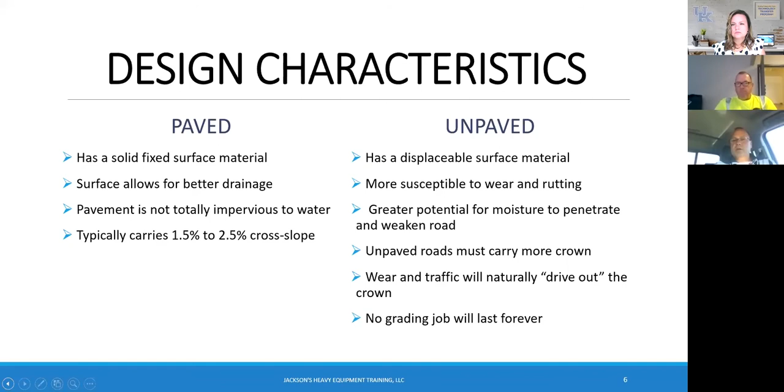Okay, let's get down here to our designs. Some of the different design characteristics between a paved road and an unpaved road - there's a lot to consider in how you maintain them. A paved road has a solid surface, whereas an unpaved road has a displaceable surface where we always have to be reclaiming material and bringing it back up onto the road. An unpaved surface is a lot more susceptible to wear and rutting, and to moisture weakening the road. They have to carry more crown than a paved road because a paved road has a solid surface. One important thing to remember with an unpaved road is traffic is going to beat the crown out of it - it's going to ruin your road, so no grading job lasts forever. When we take a look at the first design, this is a good design for paved roads.

When we take a look at this profile here, it shows a separate shoulder area. The shoulder area has a more defined slope to it. That more defined slope typically runs about 6%. On a paved surface, like we said, we're running 1.5 to 2.5%. On an aggregate road, we have to run more.

One of my recommendations is you want to try to stay around that 3 to 5% cross slope on an aggregate road for the drainage, because it requires a lot more drainage when you're out there.

If you're using this design on an aggregate road, it can be difficult to maintain. And a lot of it comes down to how you train your operators, because with that material moving all the time, they've got to try to bring that material back up onto the road and not get that lip or that shoulder.

It can also be difficult to maintain that shoulder if you're limited on your right of way. It does take a lot more extra maintenance, especially when it comes to mowing and motor grader passes and trying to recover material. But it is a really good design for a paved road, because you need to have that extra drainage on your shoulder area to keep the moisture from getting underneath your paved road.

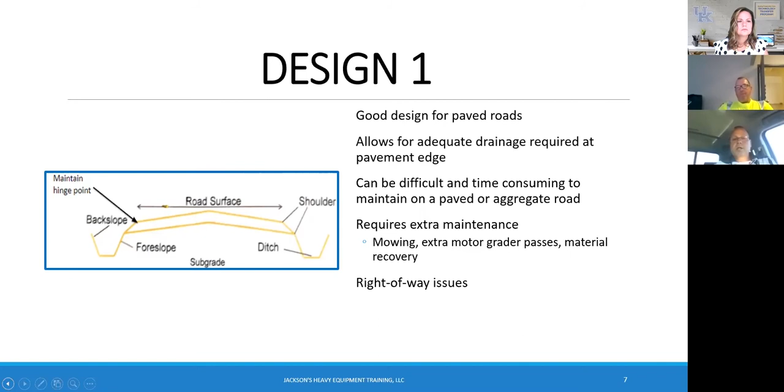When we apply design 1 to an aggregate road as an operator, especially depending on how they've been trained, we tend to lose our road. We reach out there, we're always trying to grab, and we tend to cut that shoulder down. So we create a lip on the edge of our road. And then we also lose the hinge point into our road, which is really valuable for drainage and being able to bring that material back up.

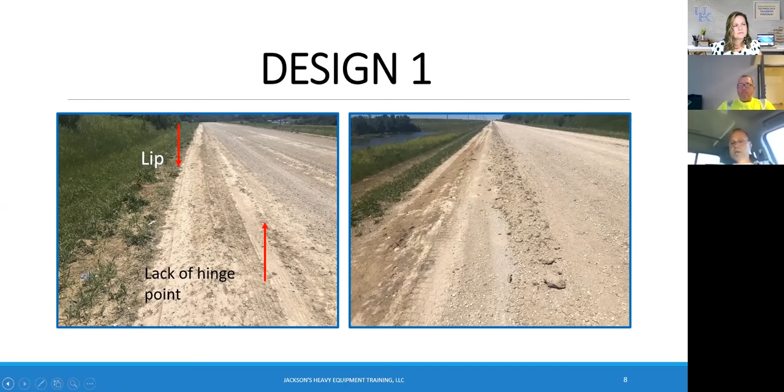But with design 1, having that extra 6%, about 3/4 of an inch, is really important to keep that water away from our pavement. We've got to keep that moisture out from underneath our pavement, and we've got to get it draining away from the road. It can be difficult to maintain because as we have that soil out there and we get drainage and the water runs, it tends to wash that all away all the time. So we have to incorporate those maintenance practices back into it to make sure we're maintaining that shoulder.

Pavement drop-offs, not only do they let moisture back underneath, which is going to cause that road to freeze and thaw and bust up, but it can also be a huge safety factor. So that's where we really have to take the time to make sure we're training our operators on how to bring that material back up. If you don't have the material there, you may have to haul it in, but typically a lot of that material is right there to where we can bring that back up onto our roads.

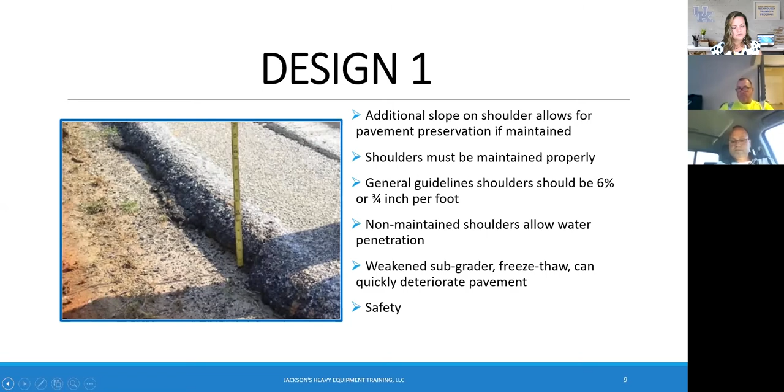When you apply this to an aggregate road, you tend to have soft shoulders. If we're trying to run that grass shoulder out there, we tend to have soft shoulders. So we're going to have to compact those shoulders to make sure that the road is firm out there.

One of the problems you run into with this design is our large agricultural equipment is used on our rural roads, so they need the extra room when they're out there to get over. If you're applying this design to an aggregate road, think of it this way. When you're driving down a paved road after a rain and you have to get over on the shoulder, what happens to the shoulder of your road? It's soft. And the same principle applies to an aggregate road when you're out there.

There's quite a few DOTs out there that use this design for rock embedment. So they'll come in and if they embed rock, they only do it on, you know, the 2 12-foot drive lanes, and they're not utilizing their whole road.

This can also be difficult to maintain if you have limited right of way when you're out there. It requires a lot more maintenance. You've got to keep them mowed. And plus you always have to be bringing back up that material when you're out there.

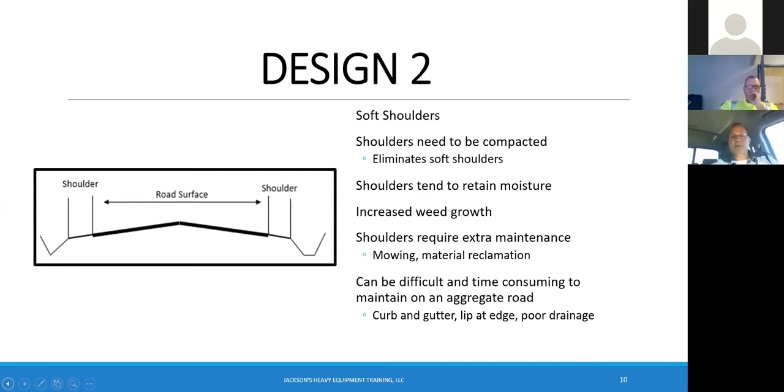It all takes a lot of training and a lot of time to teach your operators how to maintain those, plus with the additional employees that you have to be out there to mow your shoulders while you're out there.

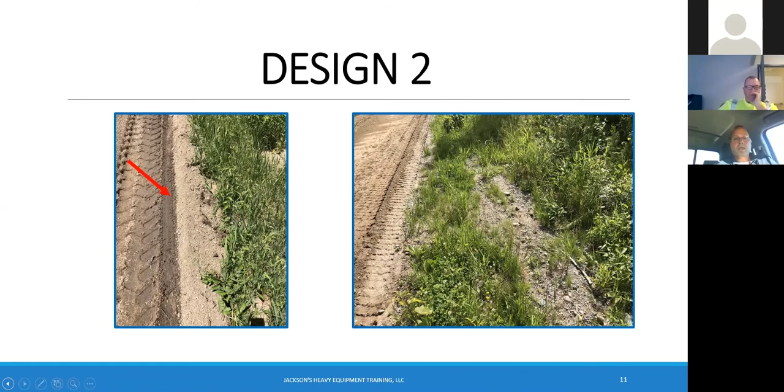Design 3 is the design I use a lot for aggregate roads. Like I said, we try to run a 3 to 5% cross slope. Give your operators a target to strive for when they're out there. I always say 4%, have them shoot for 4%. It's difficult to maintain that all the time, but give them a goal to strive for. This has a greater safety factor on aggregate roads.

One, it utilizes the entire road top. It's more beneficial if you're limited on your right-of-way, and it allows for the ease of reclamation of your material, because our material is going to get lost through traffic, weather, snow removal operations, and poor machine settings when we're out there.

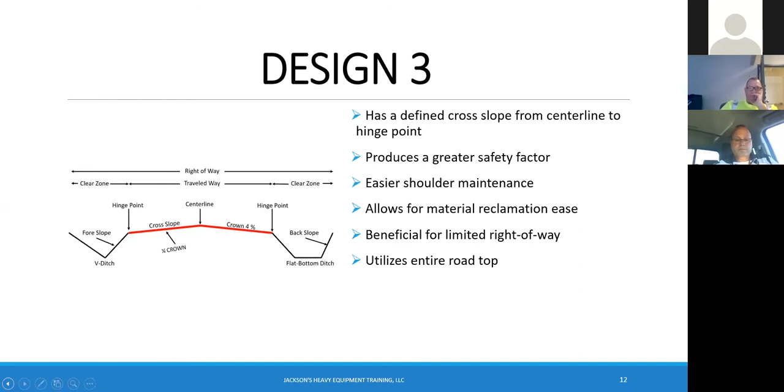When you get into reclaiming material, there's a lot of different ways to do it, a lot of different ways to set the machine. Are we going to do it as maintenance, or are we going to do it as construction?

Most generally, when you go out to look at our aggregate roads, they tend to be more round. If you have a round road, a parabolic shape to your road, you're going to get 3 drive tracks while you're out there. Traffic may still drive down the center of the road, but they're going to straddle your center line instead of placing your tire tracks right down the center of your road.

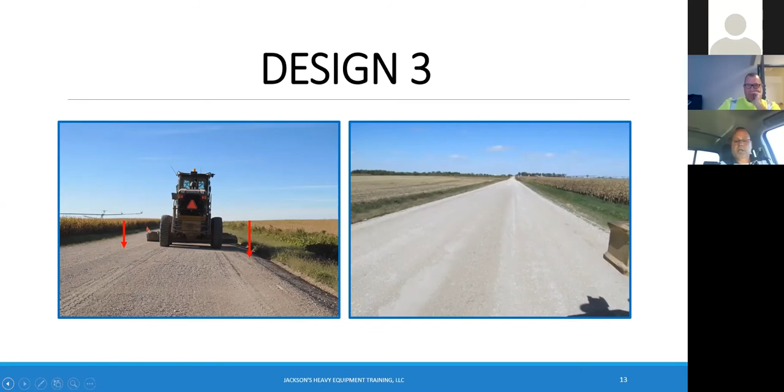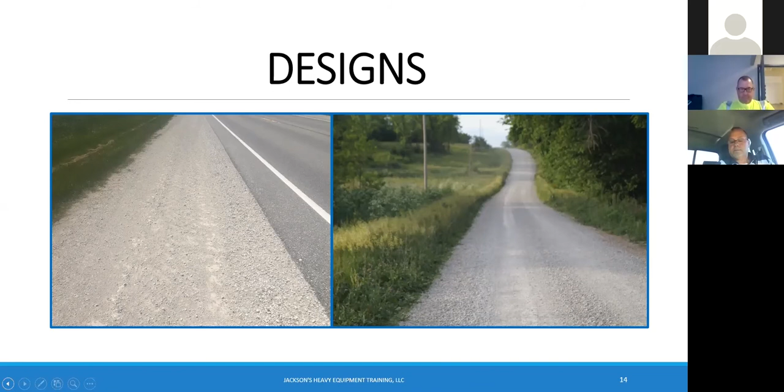So one of the things I like to find out is when you work with your operators, if you deal with aggregate roads and different things like that, which of the 3 designs that we discussed do you utilize in your maintenance procedures when you're out there?

So it looks like we're about tied 50-50 between design 2 and design 3. Does anybody have any questions on either of the 3 designs when we're out there? Would anybody like to add any input as to why they're using one design over the other?

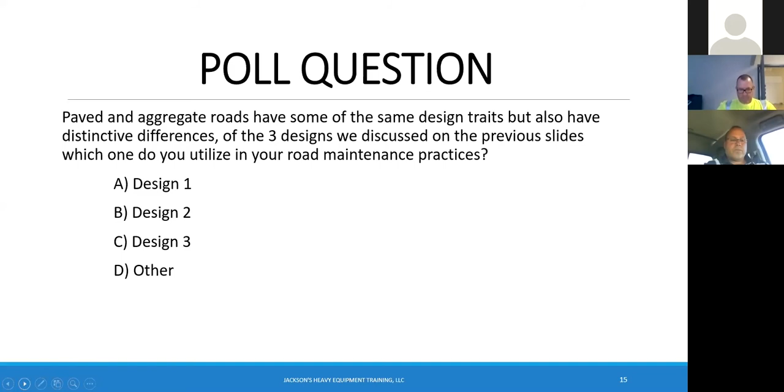One of the big things we need to do when we're out there, no matter what design we use, is have straight blades on our machine. I've done a lot of training, been all over the country, and one of the cheapest and simplest things you can do is make sure you have straight blades on your machine. You have to make sure you're rotating your blades.

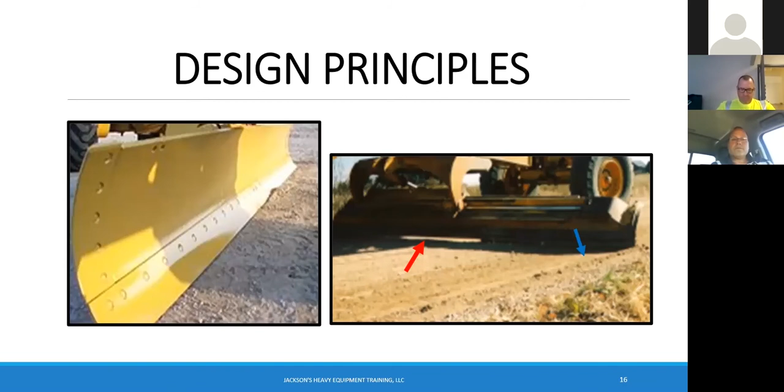No matter what design principle you're using out there, you're going to build a true A shape to your road, that modified A shape. You've got to have straight blades when you're out there, and straight blades will really help you do that. It's good for drainage and everything else.

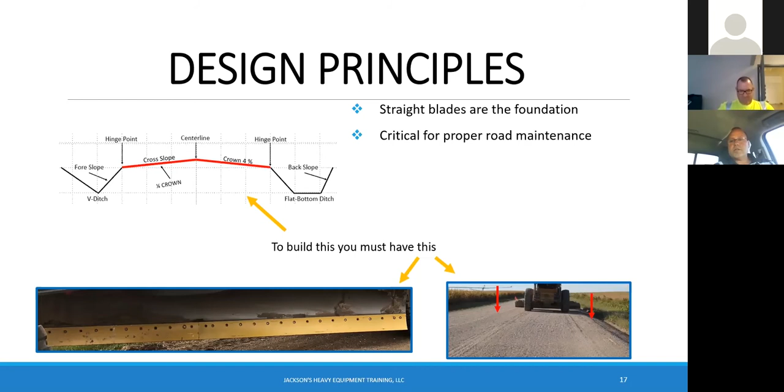Another issue I run into a lot when I'm out there doing training is cross slope. How do we determine the cross slope in our roads? What device do we use to help us determine that percentage of cross slope? What is that called?

I think Nicole was going to pull up the poll question. Right now we're looking at 100% slope meter.

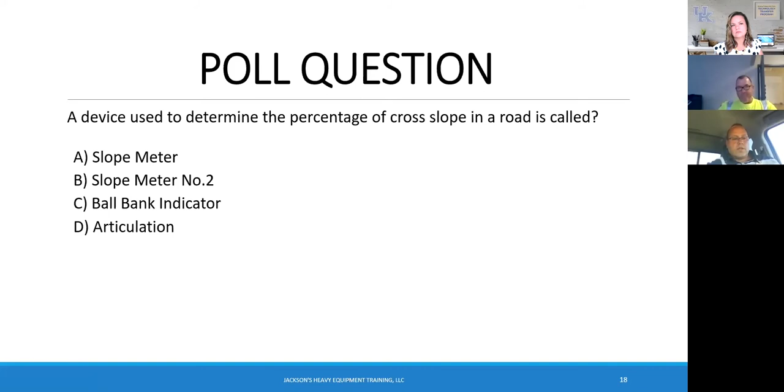There are different kinds of slope meters we can use out there, but one of the things I want you to remember is we're trying to determine the cross slope in our road. So actually, it's not a slope meter, it's a slope meter number 2. That's one of the issues I run into out there—a lot of operators are running a slope meter in their machine instead of a slope meter number 2. The slope meter shows you what you're running for, like a 3-to-1 slope or a 4-to-1 slope. The slope meter number 2 actually shows the cross slope on your road surface.

I've done trainings where operators will say, man, if I get mine all the way out to 3, it's going to feel like my machine's tipping over. Well yeah, it's going to feel like that because you're actually running a 3-to-1 slope instead of a 3% slope. There's a huge difference. So make sure when you purchase this stuff—it can be confusing—you research it and get the right slope meter designed for what your operators are going to be using it for.

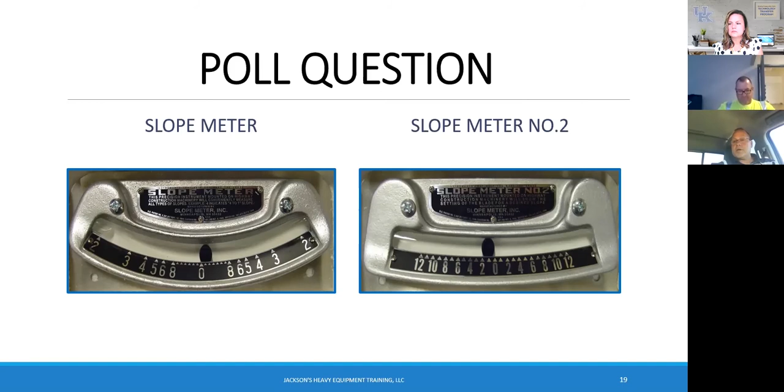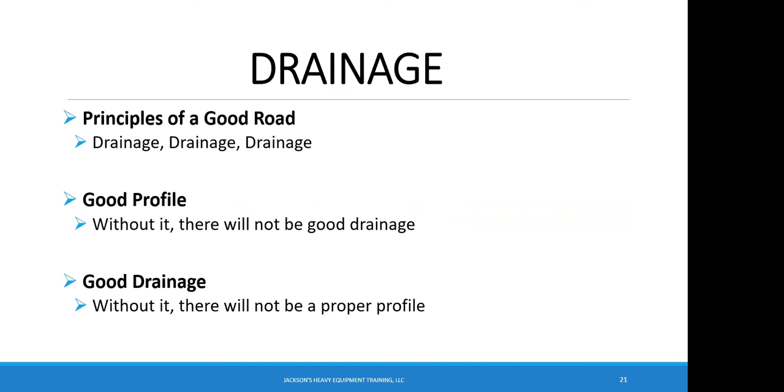We're going to talk a little bit about drainage now and the importance of making sure your road is profiled properly. Everything when it comes to road maintenance, road construction, how often you maintain a road, it all comes down to drainage. You have to have good drainage when you're out there.

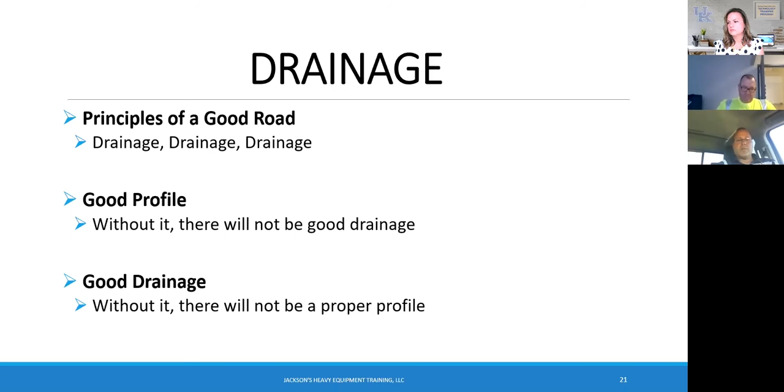You've got to be getting the water out of the center of the road and over to your ditches. It'll be difficult to maintain that profile if you don't have good drainage out there. This is probably one of the biggest issues I run into doing training—we develop that lip on the edge of our road. A lot of that comes from the techniques we teach our operators and the blades on our machines, so we're creating some of our own problems out there.

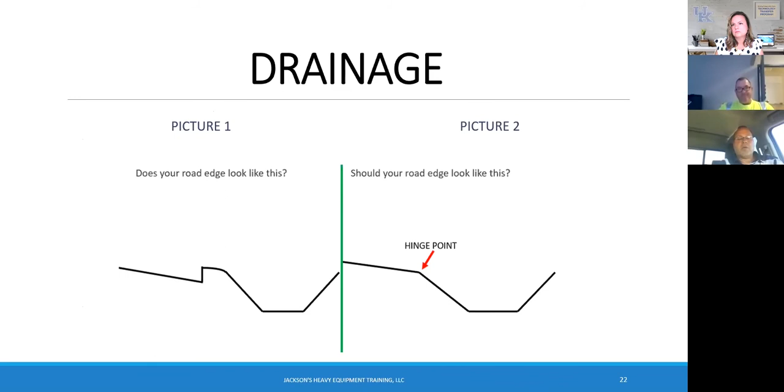We want to try to make sure we maintain that hinge point on the road so we have proper drainage. If we're getting that curb and gutter effect out there, we're going to retain that water, and it's really going to soften our shoulder and reduce the life of that road.

So when you crown a road and you want to establish the cross slope, which part of the motor grader carries or controls the grade?

This is a question too. Right now we're running about 50% wheel lean. We're about split thirds on all of them between wheel lean, the heel moldboard, and the toe moldboard. There we go, we're getting some more. Now we're changing up a little bit. Heel. Just select the answer that best describes your work.

This is always a good question too, and it really comes down to training techniques, what you're utilizing when you're out there maintaining your roads. Are you carrying windrows? Are you not carrying windrows? Are you reclaiming material, or are you just doing simple light maintenance to your roads? So all those factors play into it.

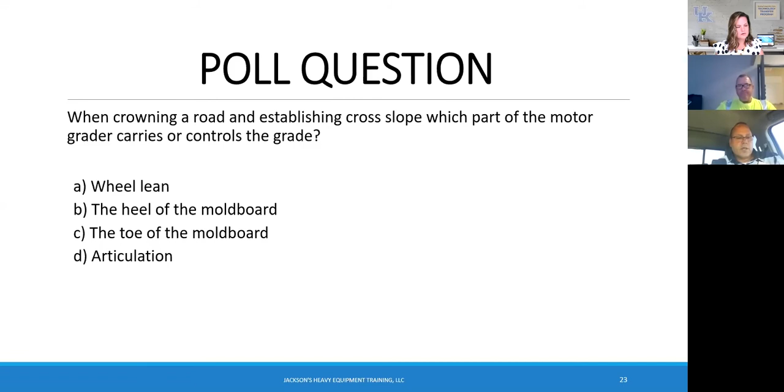It looks like the majority of the people said the heel of the moldboard, and that is correct. It's the heel of the moldboard that carries the grade when you crown a road. When you do grade work and you're forcing or cutting ditches, you cut with the toe. So over the years operators have always been taught that they've got to cut with the toe, cut with the toe, cut with the toe. And actually, the heel is what carries your grade when you're out there.

When you take a look at that top picture, you'll notice how we have our toe up about a tenth or two. If you're trying to build your shoulders up, especially if you're carrying windrows, you leave it up a little bit, so you leave a little bit of material there, so you slowly build it up. When you take a look at that bottom picture, I spend most of my day telling operators, lift your toe, lift your toe, lift your toe, because they're so used to cutting with that toe that they keep actually cutting the shoulder of their road down.

It's one of the things too, if you're not carrying windrows, they need material to fill that moldboard. They've got to fill that moldboard with material. So you're going to cause them to cut that lip out there while they're trying to feed it. So it's really important when you're out there, because one of the things too, when you look at machine settings...

When you look at that top picture with how that machine's set, the heel of that moldboard is going to be centered right on the quarter crown of our road. That's one of the big things we need to try to eliminate when we're out there, is the quarter crown on our road, to get that proper drainage. And when we get back down to that bottom picture, it all comes down to making sure we have straight blades on our machines, because you can easily see the cut in those blades.

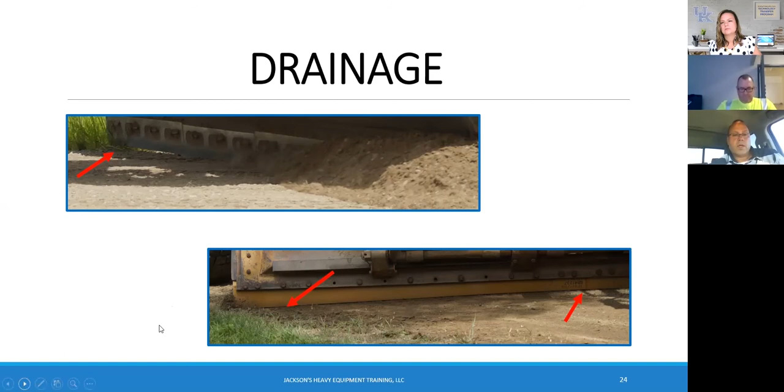One of the big things that we do when we go out there is we've got to reestablish that training - material reclamation. So much material is lost on our foreslopes, down in our ditches. Material reclamation is really important when it comes to preventive maintenance of our roads. We can't just keep putting material out there on the roads. We need to start bringing that back up.

So when we go out there, we show operators how to reestablish that foreslope. You've got to have that good foreslope. One, it's a safety factor - if those vehicles are going to leave that road, you've got to leave them the possibility to leave that road and be able to regain control and come back up onto the road surface.

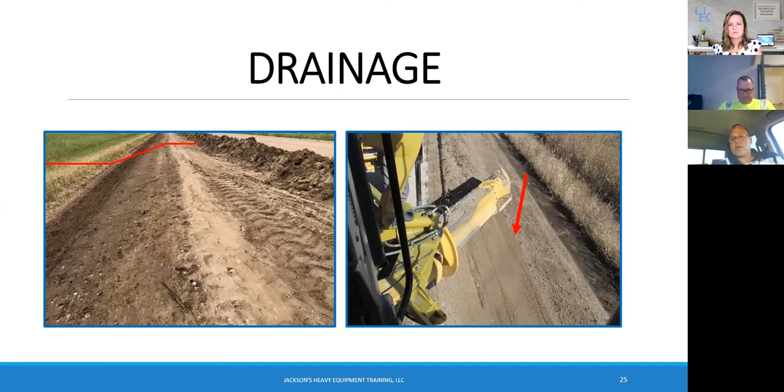So here we've established a good foreslope. We have a nice flat bottom ditch with a good back slope. We recovered a lot of good material on that road. And when we take a look at the picture to the right, you can see how we've clearly established a good hinge point when we're out there. We're really going to have some good drainage. We don't have any curb and gutter. So this is the importance of drainage.

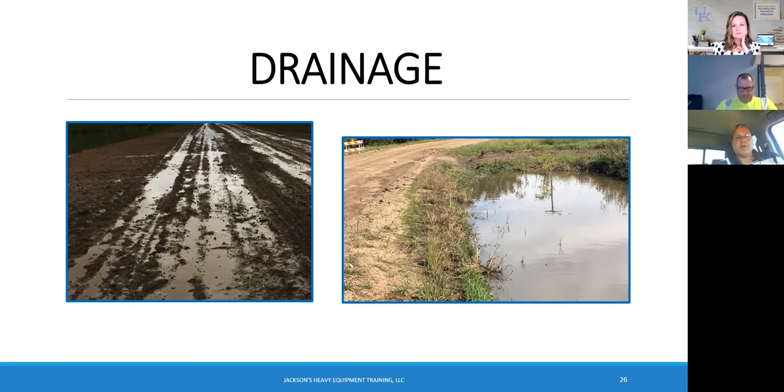This is another big issue we have, depending on which design we're using when we're out there and how we're utilizing our equipment. One of the biggest things we do is we start to cut that curb and gutter on the edge of our road. All of that's going to retain that moisture onto our road surface.

Actually, when you take a look at the picture to the left, that's where an operator had poor machine settings and didn't have the proper angle to his moldboard. So he was losing a lot of material off the end of his toe over onto the foreslope.

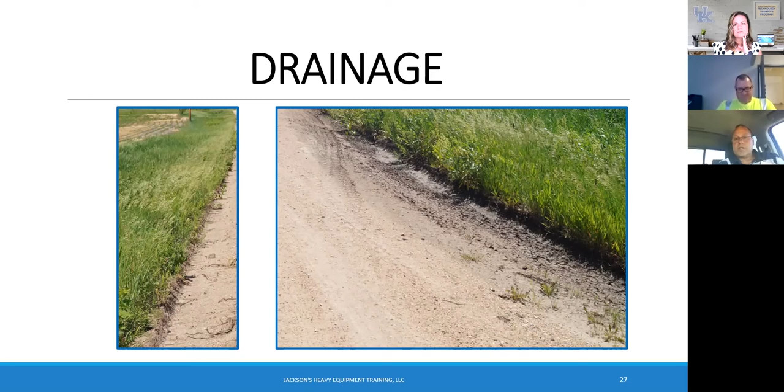It's really important we make sure we take the time to teach these guys how they need to properly do that. All right, true or false? This is my next question. To properly fix potholes or washboards down the center of the road, first you need to cut the center of the road down to the bottom or slightly below the pothole and then compact the material.

Can you still see me okay, Martha? I can. You can hear me okay? There's a few times it's popped up that I have unstable internet connection. Yeah, your voice may drag every once in a while, but it's not often.

Looks like we're split on this one. All right, we're running about 70% true, 30% false.

This is always a really good question that comes up. How do I address a pothole? How do I cut it? How do I fix it? And the importance of it. A lot of your potholes and stuff come back to your design. We get the potholes, we get the washboards on our roads, and that goes back to our design, how it's shaped.

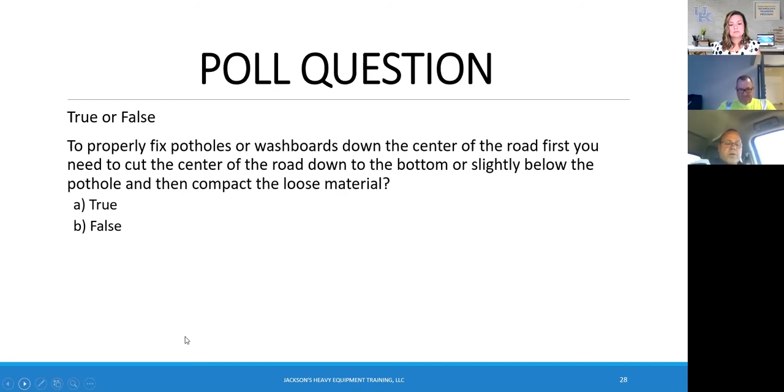And actually, the correct answer for this is false. I've got a little demonstration I'm going to try to pull up and show you. So when we start to take a look at these roads and we're getting all these potholes and washboards down our road, one of the biggest things is our road is not properly shaped or crowned right.

When we send our operators out to cut these out, if we have them go out there and cut the center of the road, we're actually making the center of the road flatter. To cut the potholes out properly, I'm going to use a little demonstration. You actually have to cut it from the center line towards the shoulder to properly profile your road.

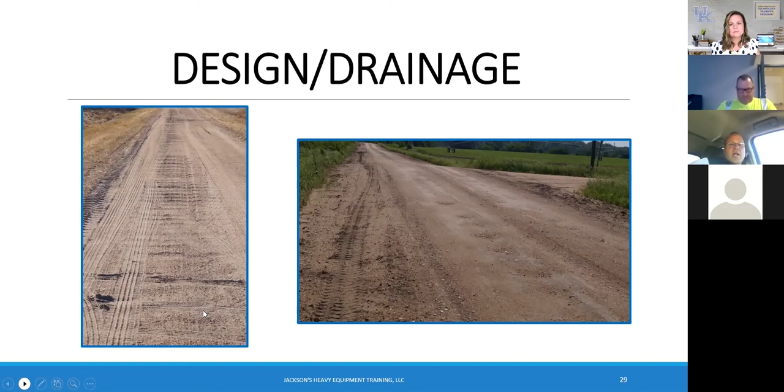I like to use a couple hinges when I do this to show this demonstration. The little holes on our hinges are going to represent potholes. The center of the hinge is going to represent the quarter crown on the road.

So I'm going to stop share for a minute, go back to my camera. Can you see me full picture? Or do you just see a little bit of me, Martha? If you can't see my hinges, just let me know.

Okay, so when we blade our roads, when we work our roads, we have to blade them like we have two halves to our road. So each one of these hinges represents a different half to our road. The reason we get potholes and stuff down the center of our road: one, the center of our road is flat, and then if you look right here, that's the quarter crown of our road.

So if I send my operators out there to cut the center of the road and cut those potholes down to the bottom, one, they're probably doing it when it's dry. Two, they probably don't have a water truck or proper moisture. So what they're going to do is actually cut the center of their road flatter and build that quarter crown.

To actually really get a pothole or washboard out of the road, you have to establish a true center line to your road, and you have to shape the road from the center of your road all the way out to your hinge point. That's the way you're going to cut them.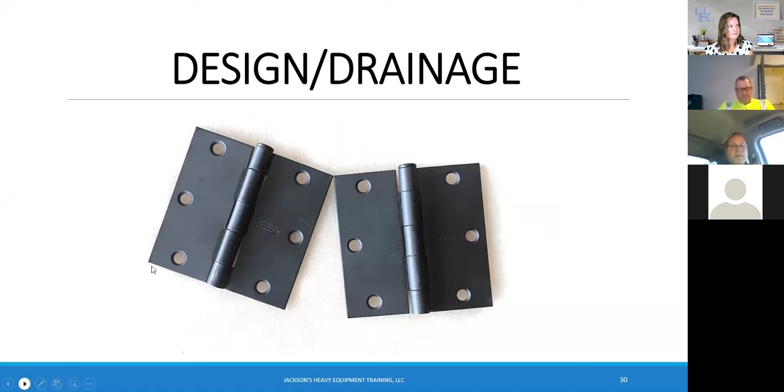So, not everybody has water trucks. Does anybody have a water truck that they utilize when they're blading their roads? Anybody? Put that in the chat pod or take yourself off mute. Anybody use a water truck when they're out?

One of the big things I find, especially when it comes to working with budgets, is you guys don't have the funding to go out there and buy a water truck. You don't have the funding to hire an extra operator to follow everybody around with that water truck. And if you're running 10, 12 machines, you don't have that funding or manpower to follow everybody around with the water truck. So I really got to push the issue that you got to make sure you get your operators out there after a rain.

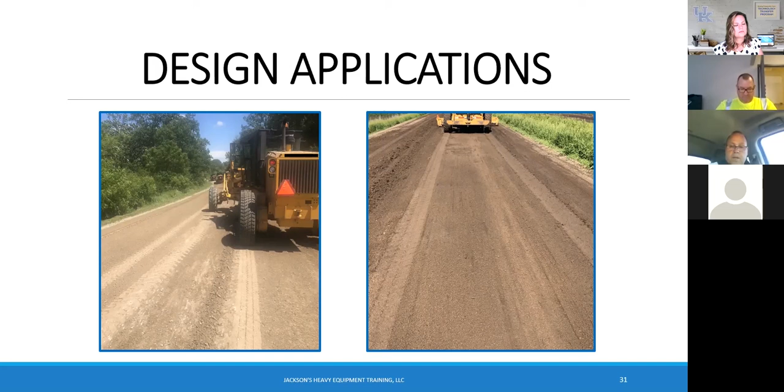So when we talk about design applications, whether we're doing reclaiming material or just simply doing some maintenance, we got into a bad spot. The time of year plays a big important part when we're out there. If we're going to start trying to reclaim some of that material we've lost during snow removal, the earlier you can start in the spring, the better. You're going to fight less vegetation, you're going to have less weed growth, and the material is a lot easier to work.

Once you start getting later into the summer, later into the fall, one of the things you're going to find is our vegetation's had a chance to grow, the ground's a lot harder, so it's going to be a lot harder to cut when you're out there. Some counties I go to have the ability to utilize a disc and different things when we're out there.

And one of the things we need to establish is guidelines for operators when we're out there. Are we wanting them to do things as maintenance, or are we going out there to actually do a total road rebuild? There's a lot of ways you can start bringing that material up just as maintenance, so that every time you pull that shoulder, you bring some material up, and you don't have to re-rock your road.

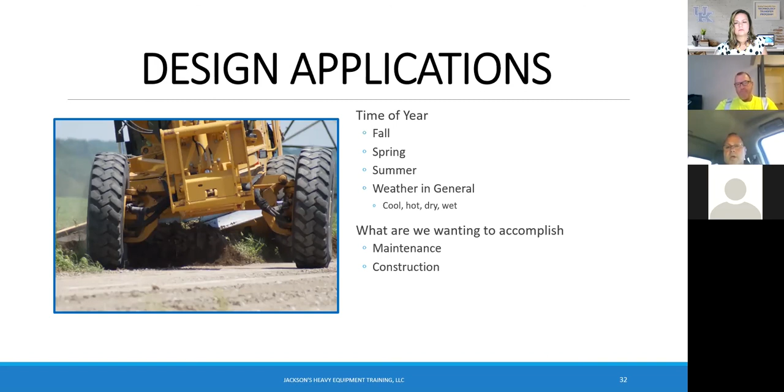I like to talk about the importance of training. It takes a lot of skill to be a good operator. It takes a lot of training.

When we look at the picture to the left, the operator didn't quite have the angle set right on his blade. Improper blade angle over the course of a year can cost your entity. I've got a formula I could show you, or you could reach out to me. You could be losing $40,000 to $50,000 a year in material just from an improper blade angle on your machine, and that doesn't factor in weather, traffic, snow removal, and all that other stuff.

One of the other things I like to talk about is that with your guys' jobs, you have to do so much more than be an operator. You've got to be sign techs. You have to do so much when you're out there. It's really important for training, and safety is everybody's responsibility.

It's the public, it's the worker, it's everybody, and it's an attitude. You have to practice it. If you're in a management position and you're all on board for safety, your employees will feed off of that.